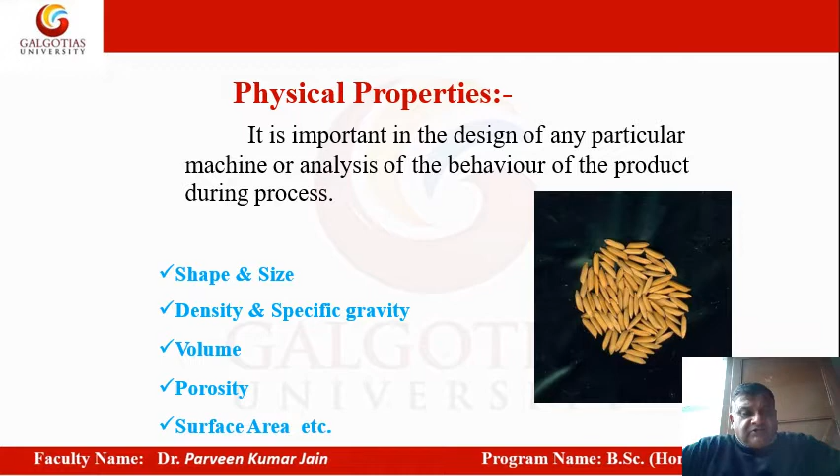Shape and size, density and specific gravity of the grains, the volume, the porosity, the surface area, etc., are the physical properties which influence storage.

The importance of these physical properties is necessary for designing the cleaning unit, grading unit, separating unit, handling units, sorting units, storing units, and drying systems.

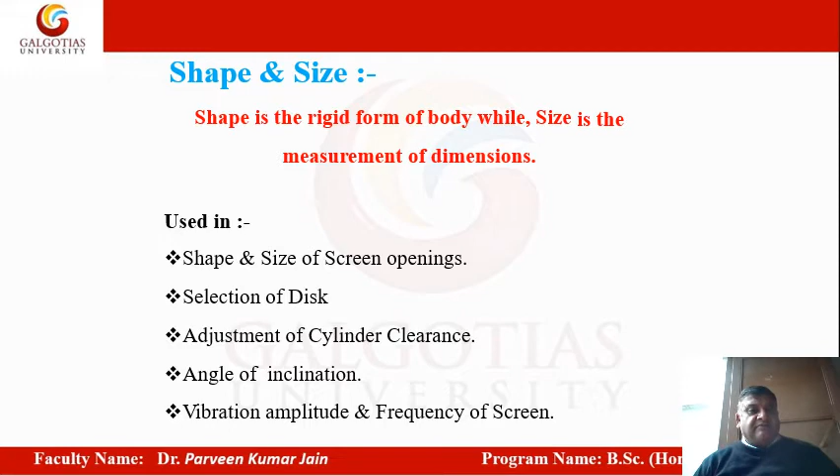Shape is the rigid form of a body, while size is the measurement of its dimensions. So we can decide the size of screen opening, selection of disc, adjustment of cylinder clearance, angle of inclination, and vibrations - these are machine parts decisions based on the shape and size of the grain.

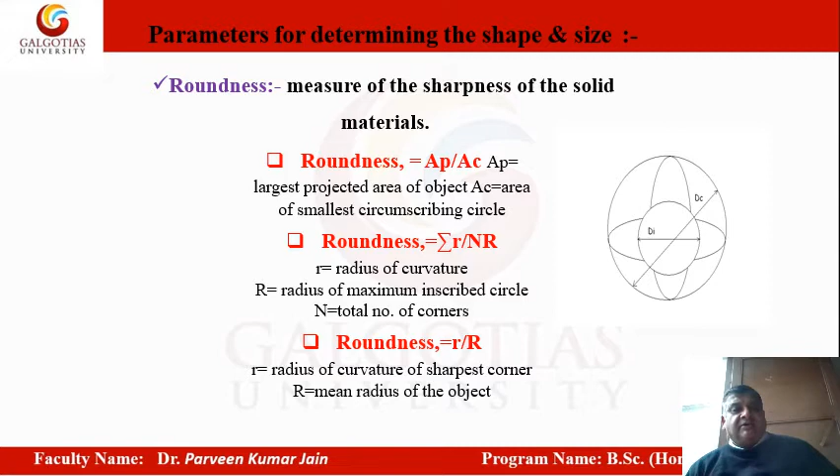The sphericity or roundness of the grain is also important because it affects the surface area. This is helpful when discussing big grains, where the volume is affected particularly by the roundness of the grains.

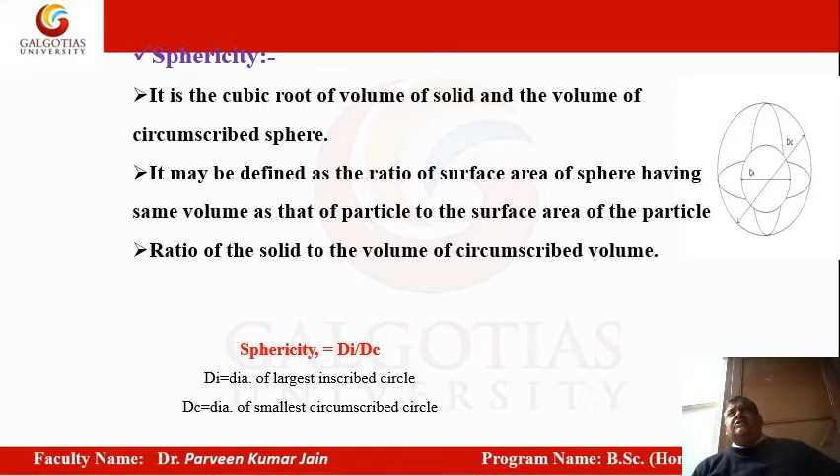The sphericity is the cubic root of volume, and on the basis of this we can calculate the volume per seed or per grain, which can be expressed as a ratio with the help of the total grains present.

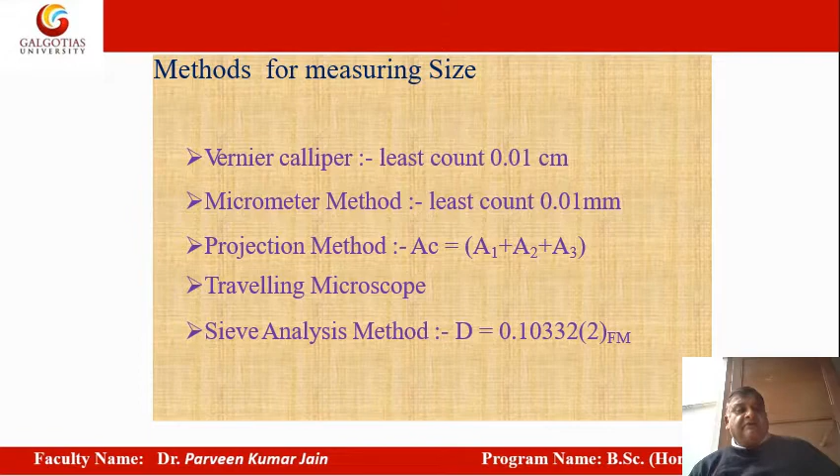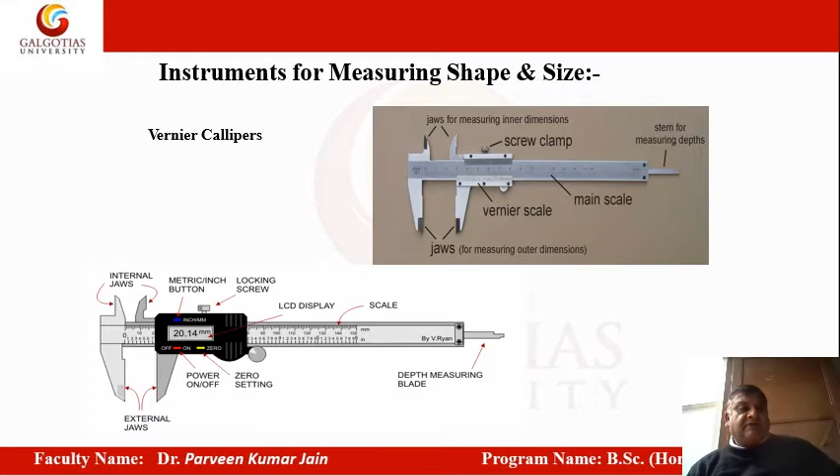This is the vernier caliper, which you must have used in your school physics practicals. It is used to measure the thickness or diameter of a spherical grain, or the length or width of a grain.

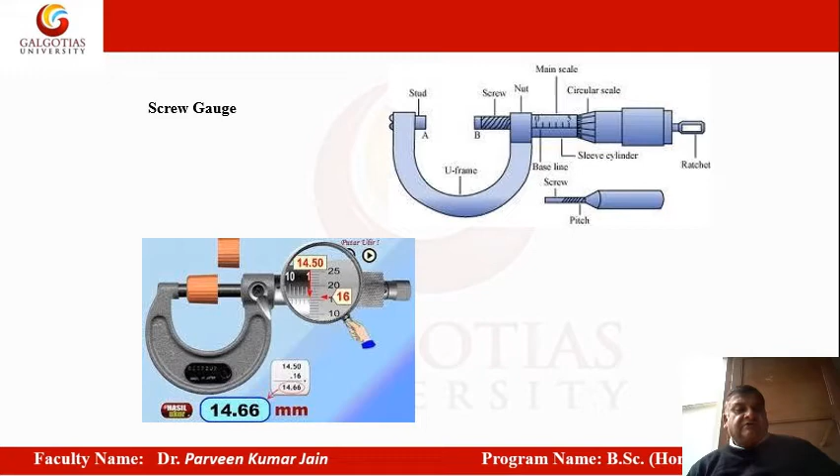The screw gauge can be further used if the grain is smaller in size - the thickness can be measured with the help of screw gauges.

The next important physical property is density and specific gravity. Density is the mass per unit volume, and on this basis we take decisions.

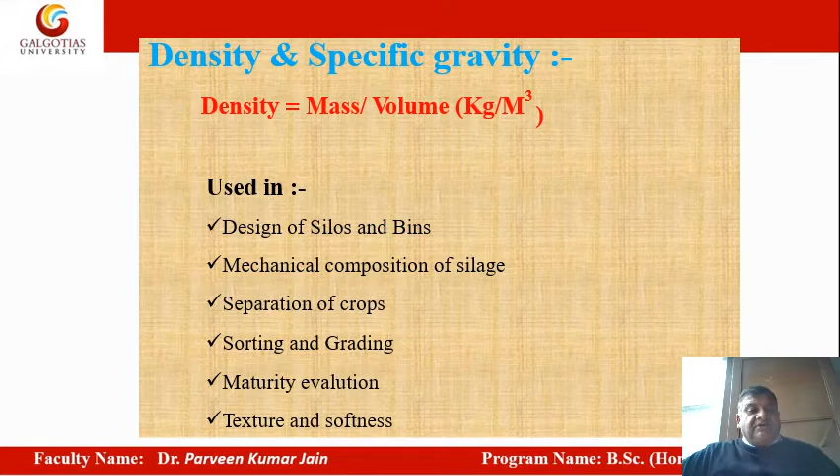Decisions are made on the basis of design of silos and bins, mechanical composition of silage, separation of crops, sorting and grading, maturity, texture, and softness.

Density and specific gravity are also important for decisions regarding bulk density, true density, and apparent density. They are important for determining how much material can be accommodated in a structure.

For example, if a silo is made, how much material can be added to it depends on the density. If it is fluffy, less quantity will be added. If it is denser, more quantity can be added.

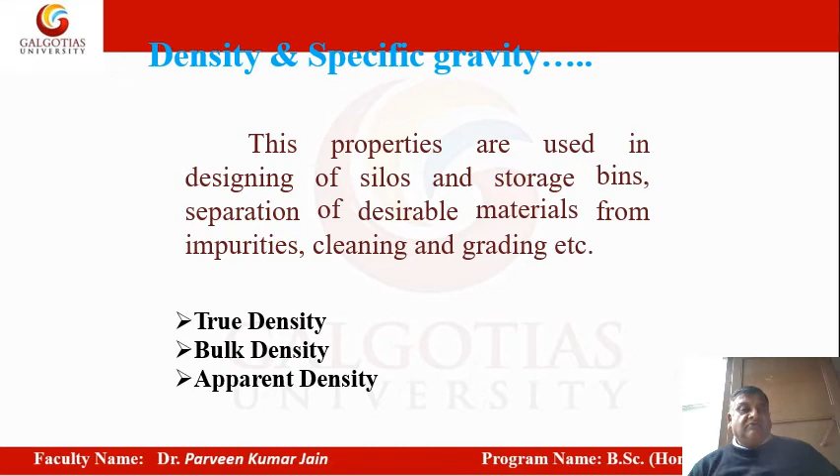Specific gravity also plays an important role, just like density, so that materials can be added accordingly.

This is measured with the help of the suspension method, density column method, and platform method. As we are discussing these physical properties, you should have an idea of all these things. We are not going deep into physics, but we should know these play a very important role when looking at drying and related concepts.

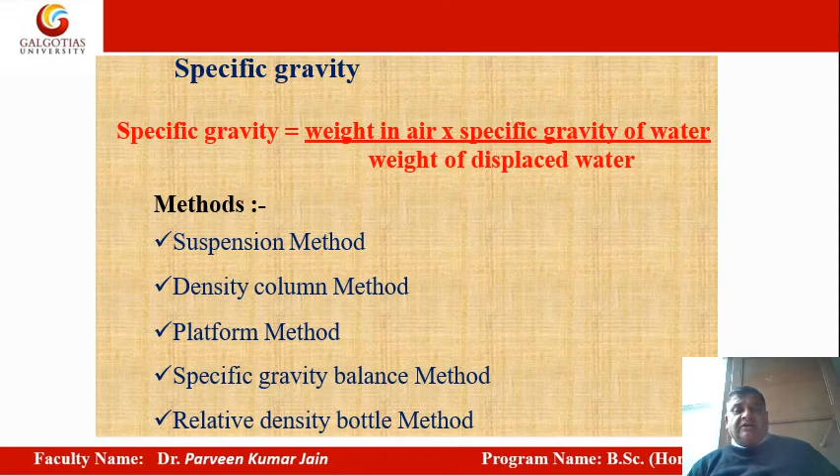The relative density also plays a very important role - relative to air or relative to water. There are formulas to calculate the relative density.

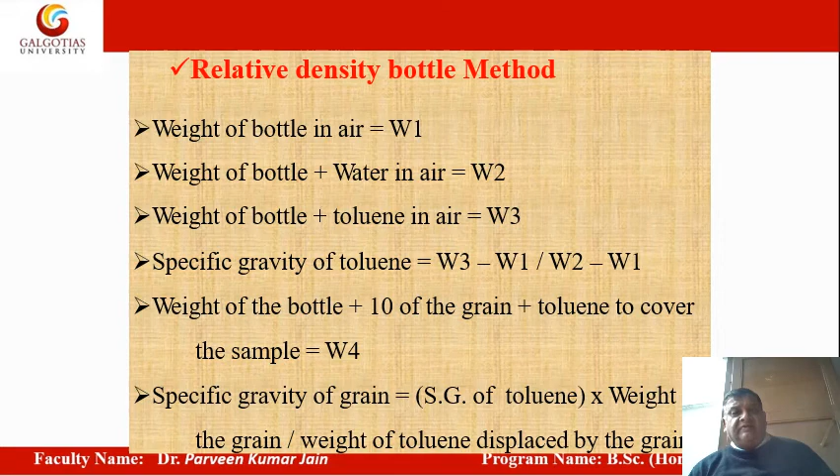Porosity is the relationship between the volume of intergrain space and the total volume of the grain mass. This is the space of air occupied between the settled grains, for example.

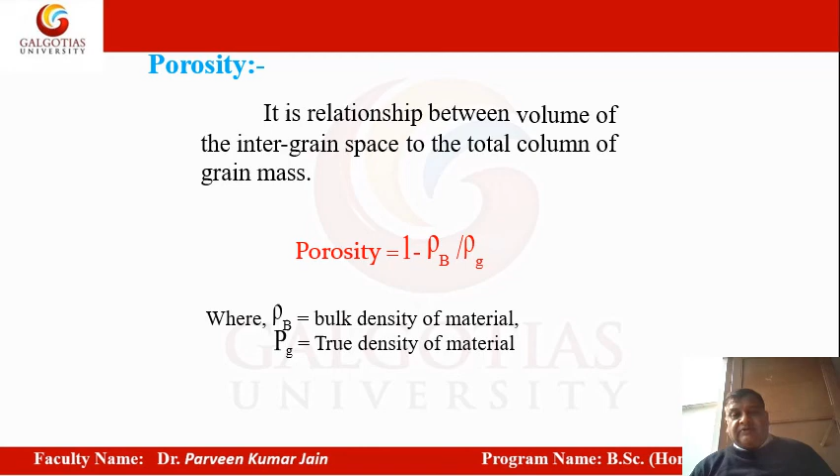So this is about the physical properties which affect these storage and handling aspects. Thank you, students.